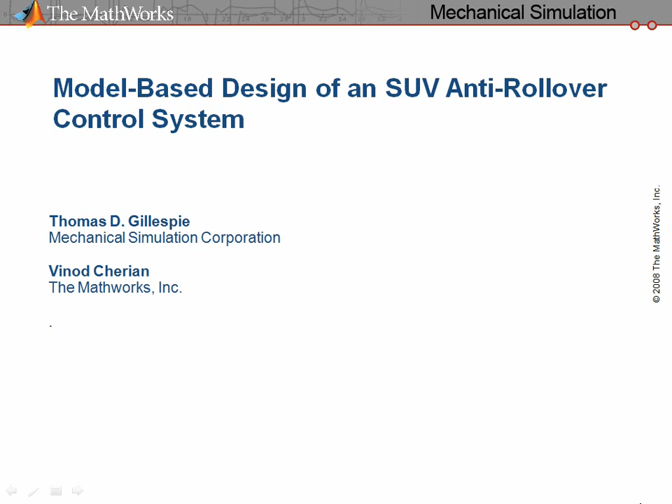Together, we'd like to talk to you about rollover, one of the more important vehicle dynamics issues facing the automotive safety community today. First, I'll give you some background on the rollover problem. Then I'll introduce one of the tools that has been so helpful in solving this problem, the CarSim Vehicle Dynamics Simulation software. CarSim will be used as a virtual vehicle model for development of solutions to the rollover problem. The solution takes the form of an anti-rollover controller.

This is where Vinod will step in and talk about design of the controller using tools available in Simulink and methods to optimize the design of the controller. After Vinod finishes his summary and conclusions, we will both be available to answer any of your questions.

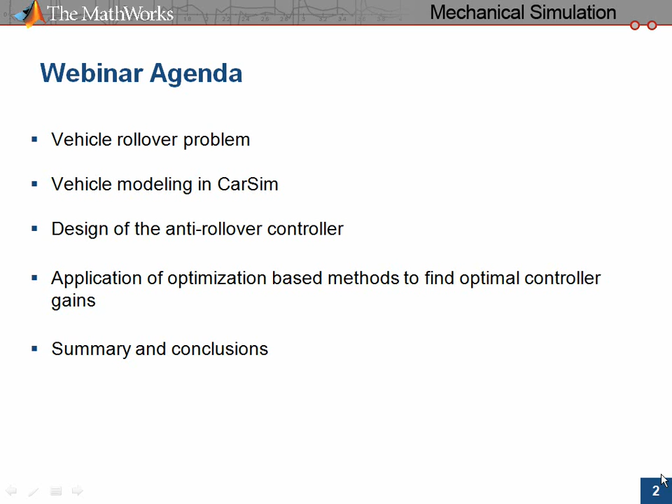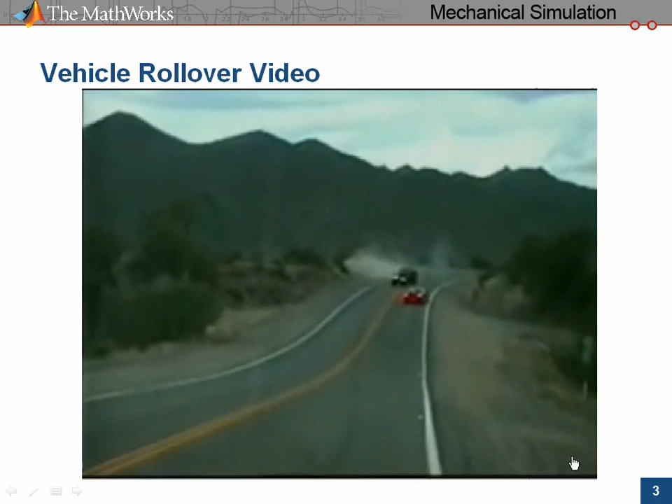Rollover can occur just about anywhere, in many cases without any interaction with other vehicles. On the open road, just a moment of distraction, allowing wheels to leave the road at high speed, can precipitate loss of control, often leading to rollovers as seen here. These are known as single vehicle accidents. The interest in this type of an accident arises from the fact that it is so common and involves only a driver and a vehicle. Thus, we can potentially prevent many of these accidents if we can improve the vehicle's dynamic behavior to make it more controllable.

Rollover is a high-risk accident type. Even though they are only 2% of all accidents, they account for approximately 25% of highway fatalities in the United States every year. Consequently, there's a lot of interest on the part of the automotive industry and government to find ways to reduce the risk to the driving public.

In the United States, NHTSA, our National Highway Traffic Safety Administration, began trying to regulate rollover performance as far back as 1973 by devising a rollover standard for new vehicles. It gives you a clue as to how difficult the problem has been when you realize it took them until 2003 to devise a rollover test acceptable to all the stakeholders in the automotive and safety communities. The test they adopted is known as the fishhook. It is used in evaluating performance for the STAR safety ratings assigned to new passenger cars.

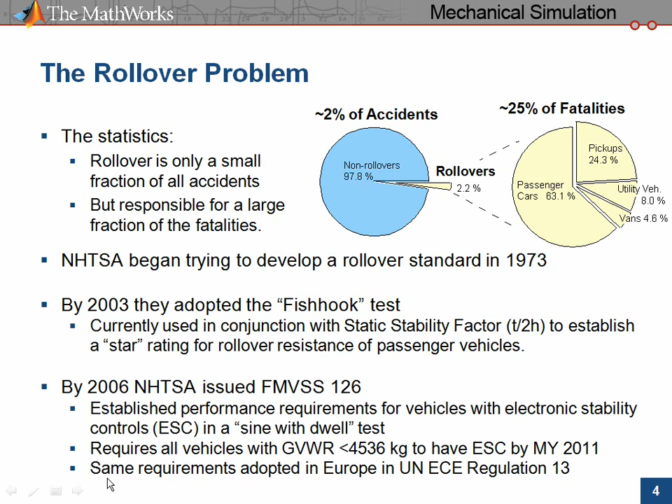Continuing development of the test method led to the Sine with Dwell test adopted in 2006 for the Federal Motor Vehicle Safety Standard 126. FMVSS 126 requires electronic stability controls on all light vehicles by the 2011 model year and specifies dynamic performance requirements for the ESC. Since it's a Federal Motor Vehicle Safety Standard, all new vehicles will have to meet the requirements of the standard in order to be sold in the United States. This same requirement has been adopted in Europe under UNECE Regulation 13.

To give you a feel for rollover testing, we'll take a few minutes to look at the fishhook. Rollover test procedures generally begin with a steering calibration. The purpose is to adjust the procedure for the steering gain of the test vehicle, since steering gain varies among vehicles. The calibration measures a reference steering wheel angle, which is the angle that produces 0.3 Gs of lateral acceleration at 80 km per hour. The test steering wheel angle is then set at 6.5 times this value.

The rollover test procedure involves driving the vehicle at a prescribed speed on a skid pad and applying the steering input shown in this graph at lower left. The tests cover a range of speed and load conditions. This is a very aggressive test, requiring steering at high rates to exact angles, which are precisely timed to the vehicle roll response. The test begins with a steer in one direction to the test steering wheel angle at the rate of 720 degrees per second.

Then, just as the vehicle rolls to its maximum angle, indicated by the drop in roll rate to less than 1.5 degrees per second, the steering is ramped in the opposite direction to the same angle, again at the rate of 720 degrees per second. The vehicle fails a test if there is a liftoff of the two inside wheels.

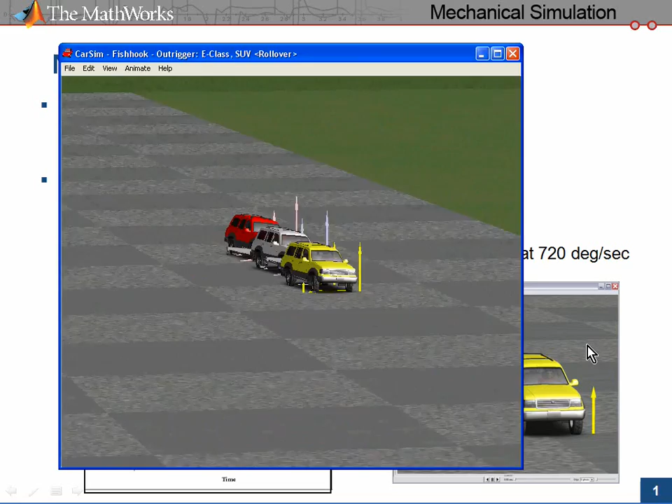The front vehicle is stable throughout the test. The second one becomes unstable, sliding sideways, and attempts to roll over, but is prevented by the presence of the outriggers. The rear vehicle goes roll unstable at the outset, but is allowed to roll over. I can show you this again from a different angle using the CarSim animator, pan, and zoom features.

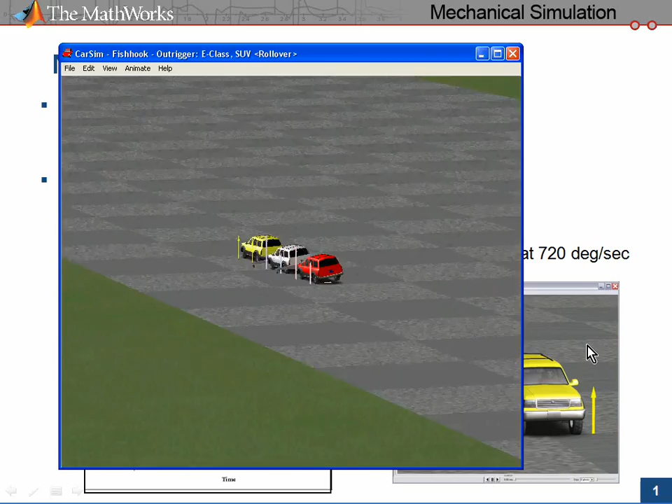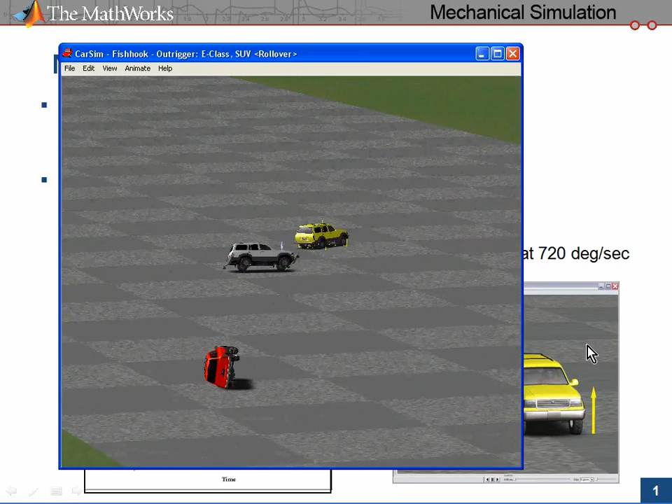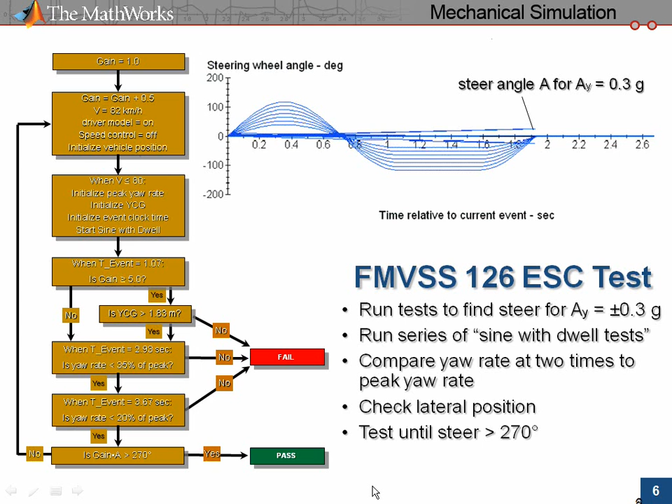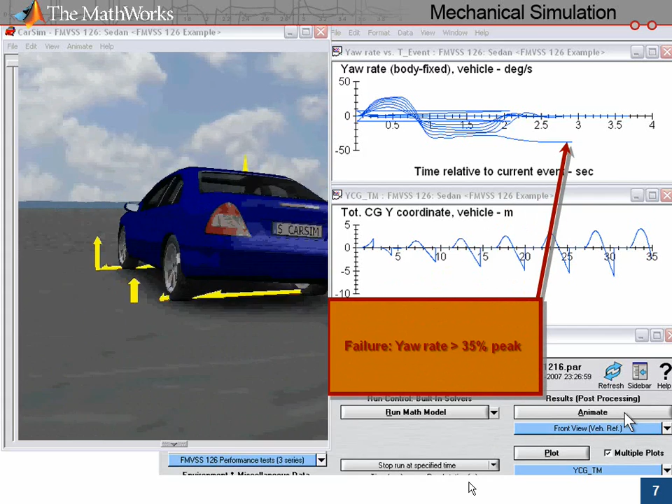This slide shows an animation of the FMVSS 126 test on a sedan without ESC. The animation has been edited to show only selected portions of the test, starting with a steering calibration, then testing at increments of steer angle until failure occurs due to uncontrolled yaw rate. Designing and developing vehicles that meet these requirements presents challenges.

If we let this angle build up, so does the lateral acceleration. Thus, by rotating the vehicle into its direction of travel, the lateral acceleration can be decreased to prevent rollover. On modern cars, we have a way to do this. The control of individual brakes that are part of the anti-lock braking and traction control system allows us to brake wheels on just one side of the vehicle to rotate it into its direction of travel. Though a simplified explanation, this is the function of an anti-rollover controller, such as an electronic stability control.

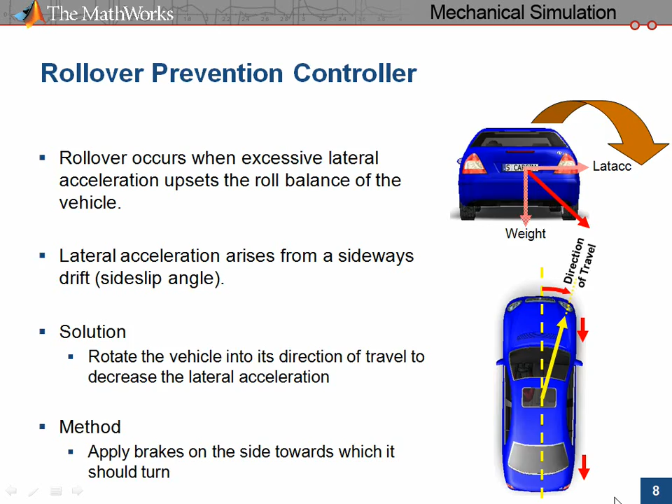Meeting these requirements challenges the OEM and Tier 1 suppliers in several ways, specifically designing the controller and testing to verify its performance. Controller design involves several challenges. One is to devise an algorithm to use whatever information can be measured or estimated regarding the vehicle state to achieve stability. Difficulty in tuning the controller parameters using analytical methods adds to the effort. And finally, maintaining compatibility with other systems like the ABS, traction control, or electronic stability control are also required.

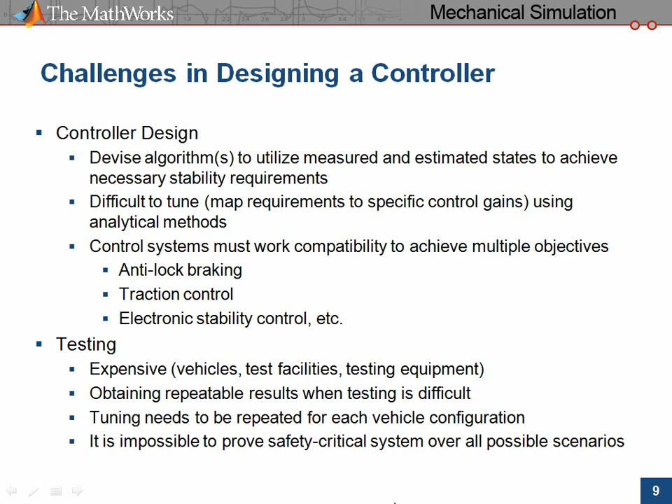Testing presents other barriers due to its expense, because of the need for vehicles, test facilities, test equipment, engineering time. And experimental testing always presents difficulties in obtaining repeatable results. And third, tuning the solution needs to be repeated for every vehicle variation or configuration. Even then, it can be impossible to prove safety-critical systems over all possible driving scenarios. Simulation provides the means to develop and prove out a design.

CarSim can provide the vehicle dynamics component of the solution to this problem. It's a time-based dynamic simulation program that is proven and validated over more than a decade. It's used by major OEMs like GM and Toyota and by the major Tier 1 suppliers. It's real-time, so you have fast solutions.

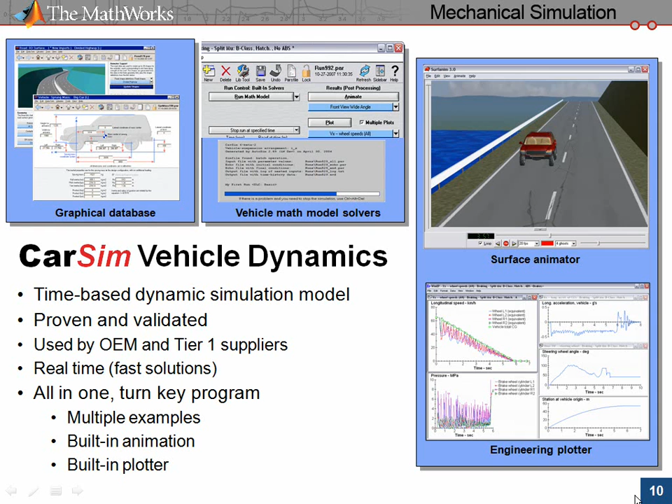And it's an all-in-one turnkey program because it comes with multiple examples, so you can immediately make runs or modify data, has a built-in animator that allows you to look at the test results immediately, and it has a built-in plotter that gives you instant quantitative results.

CarSim comes with vehicle data sets for a dozen vehicles, from A-Class through F-Class, sedans, sports cars, vans, SUVs, and pickups. As we'll see, the models can be modified with Simulink or C-Code. CarSim includes dozens of test procedures, including the fishhook and FMVSS 126. An events feature allows users to monitor variables during the progress of the procedure and make changes when desired.

For example, events allows a tire data set to be replaced in the course of a run to simulate a tire blowout, or to construct complex maneuvers such as the FMVSS 126 sequence. CarSim includes numerous test sites to choose from, such as road courses, skid pads, hills, curves, circles, and varying friction and wind conditions. Once the user has selected the vehicle, procedure, and test site, a click of the Run button causes the execution of a solution faster than real time.

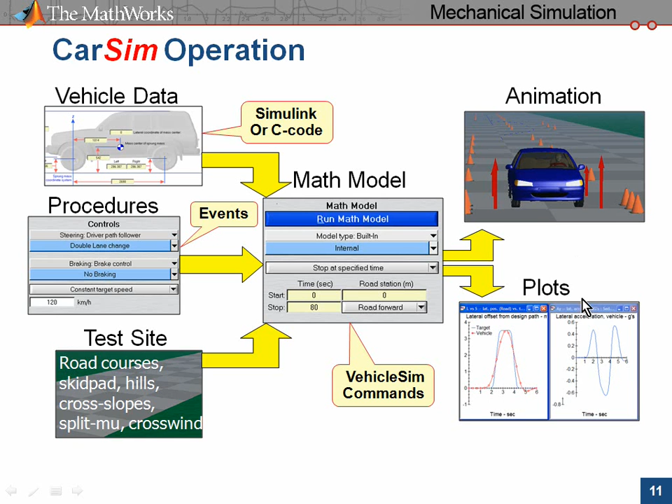And upon completion of the run, the user can immediately animate the results to make sure the test proceeded as planned, and then click on the plotter to examine the results in detail. In terms of the vehicle model itself, CarSim is a core model with high-fidelity representation of the major automotive systems. The basic systems are the body, suspensions, engine and powertrain, steering, brake systems, and tires. CarSim also has trailer options.

In the design of CarSim, it was recognized that experts working with each of these systems will potentially want to add detail to the model of their system or implement a corporate model. So CarSim has been configured to easily accommodate additions or substitutions for each of the systems in the model. For example, steering system engineers can enhance or replace the CarSim steering model with their own formulation in Simulink or C-Code, yet still use the same core vehicle model as their colleagues in other departments.

If appropriate, they can even share their special steering model with others by exchanging parameter files. If it's necessary to share files with others outside of the company, for example, a supplier, portions or all of the files can be encrypted. This close working relationship with Simulink is reflected in the easy and convenient co-simulation environment created for CarSim and Simulink.

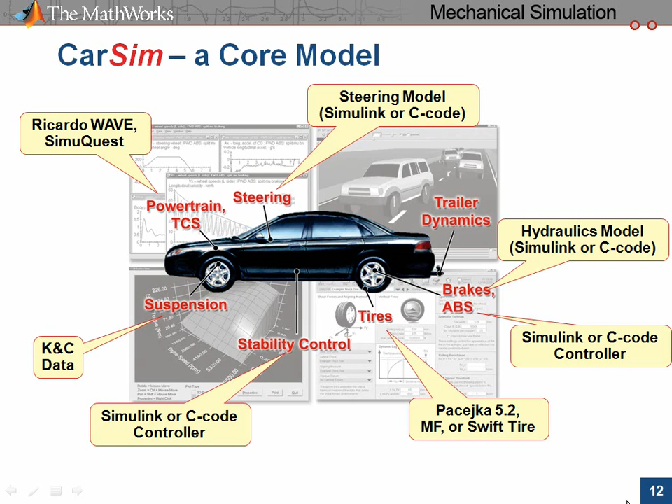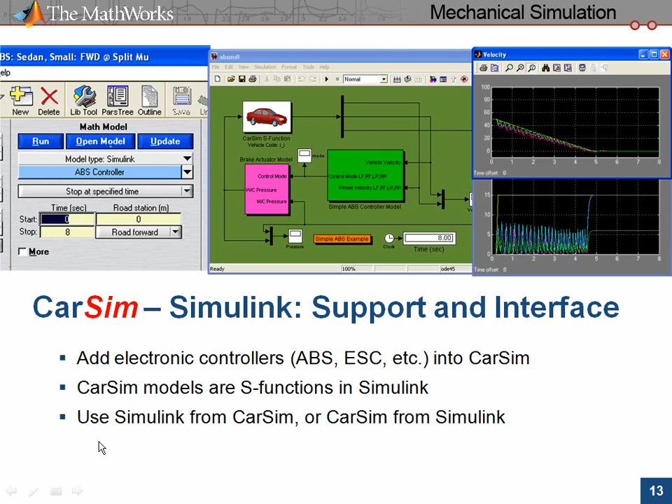Once the controller has been designed and reproduced in hardware, this same environment can be used for testing the hardware with exactly the same vehicle model in CarSim real time. CarSim, installed on a host Windows machine, provides the same familiar interface with animator and plotter functions. The real-time solver is installed on a target computer with a real-time operating system to talk with the controller hardware.

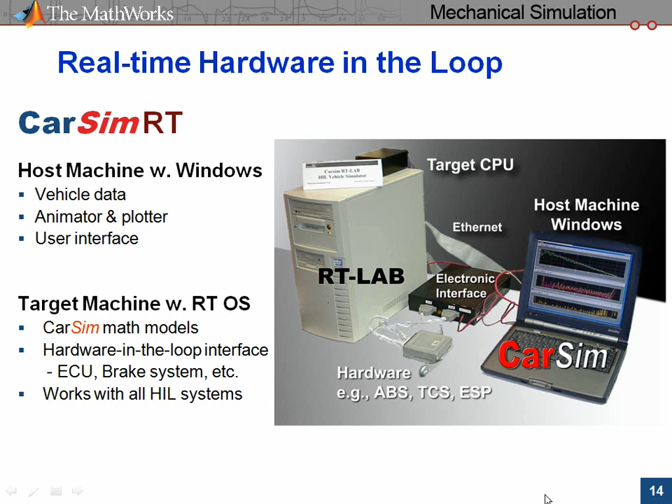With this easy and convenient interconnection to hardware, CarSim is being used extensively for HIL testing throughout the world, including serving as the vehicle dynamics model on over 100 driving simulators. In review, CarSim is a natural partner for co-simulation with Simulink. It is a proven and validated vehicle dynamics solution, providing the selection of vehicle models, test maneuvers, and animator and plotter functions necessary for control development.

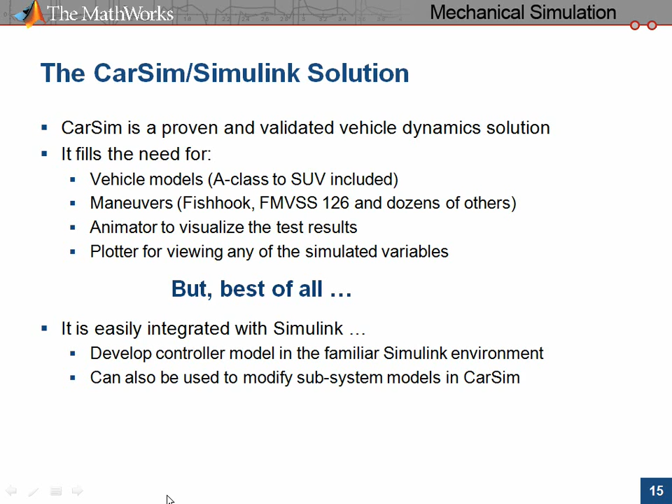Best of all, it's easily integrated with Simulink, presenting the user with a familiar environment for creating the controller functioning as a subsystem in a CarSim vehicle dynamics model. I'm now going to turn the presentation over to Vinod for discussion of the controller. The example we will use today is a standard vehicle model from CarSim for a midsize SUV, and we'll use the NHTSA fishhook test from CarSim as the benchmark for testing the controller's effectiveness.